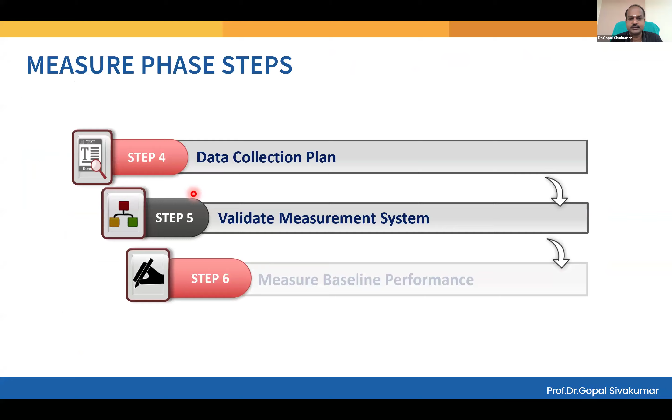Clear, all of you? A very scientific way of gaining control over the process. And you're not simply going with opinion. If you go with opinion, sometimes your decisions will go wrong. But if you go with average and standard deviation, things just cannot escape from your eyes. Hope all of you understand whatever I spoke so far. Yes, sir. All this I have discussed with you on the previous day. So straight away, I'm going to the CP and CPK.

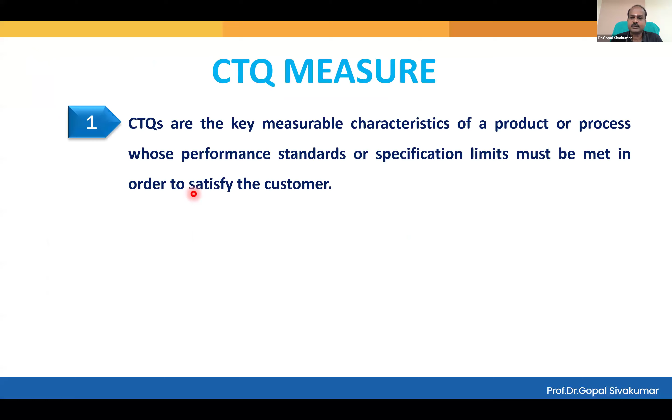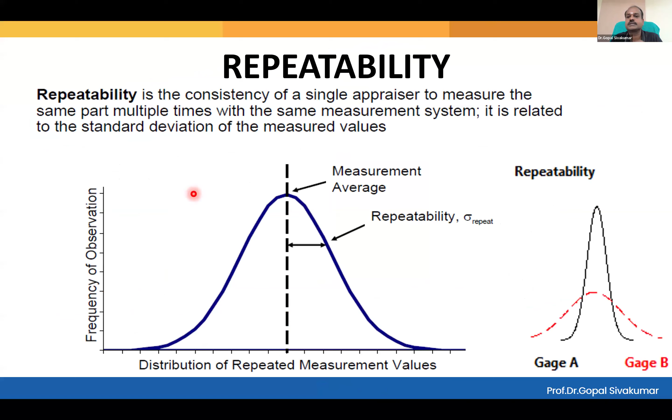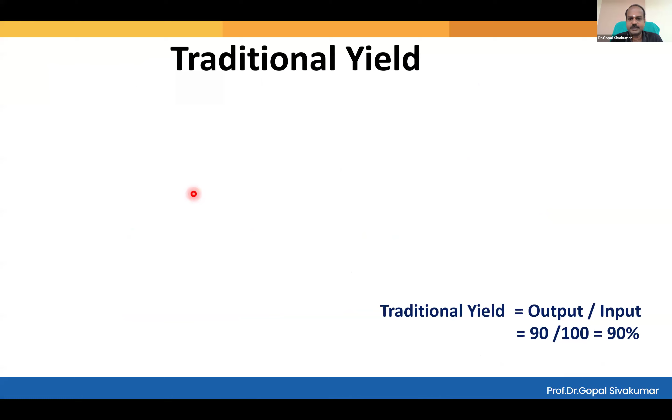Now, the very important things as far as CP and CPK are concerned are upper spec, lower spec, process average, process standard deviation. Just these 4 things, if you have, you can calculate CP and CPK. Yield, DPMO, all were taught to you. Very good. So now comes the formula for your CP and CPK.

CP is known as potential process capability ratio. The name itself indicates something. Can you see the word potential here? Potential means there is a possibility. CP doesn't confirm real capability, right? But CPK is known as process capability index, which means it has a measure of the real capability of your process. So out of the 2, which is better? CPK is better, because it carries information about the real capability of the process.

Hereafter, when you want to conclude about the capability, please look at CPK. If you simply look at CP and make a decision, you may go wrong. But if you look at CPK and take a decision, you cannot go wrong. Why is CPK advantageous? Look at the formula. In CP, what is USL? Upper specification limit. LSL means lower specification limit. Sigma means process standard deviation, calculated from the process data. Only this much information is used to calculate CP.

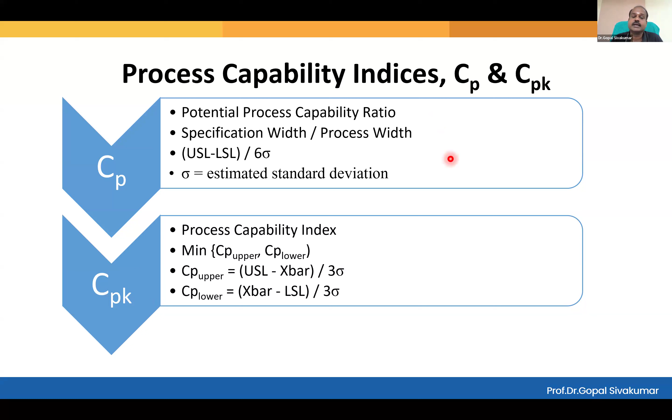See, why am I very much concerned about the average? When you want to shoot the target, you want to know whether your bullets are closer to the target, isn't it? And particularly, whether the majority of the bullets are closer to the target or not. For that, you need to look at the average. If the average is closer to the target or on the target, it confirms that the majority of your bullets are closer to the target. Okay.

And now you see a process here, all of you. What is the upper spec here? 50. Lower spec is 30. So what is the customer targeting? Customer target is how much here? 40. And now your process average, X bar. X bar is how much? X bar is also 40. Customer target is mu. Process average is X bar.

All of you, do you understand the difference between customer target and process average? Yes, sir. How do you understand customer target? One target specified by the customer. Actually, it is the midpoint between upper spec and lower spec. And you want to make sure your average appears on the target. So in this case, X bar is 40, customer target is also 40. Is it a good scenario or bad scenario? Good scenario.

And now your process control limits. Control limits are nothing but the points 3 standard deviations away from the center. In this case, standard deviation is assumed to be how much? 2. So your upper control limit will be 40 plus 3 times standard deviation, 46. Lower control limit, 40 minus 6, which is 34. Now, are you able to see your control limits inside the specification limits? Yes, sir.

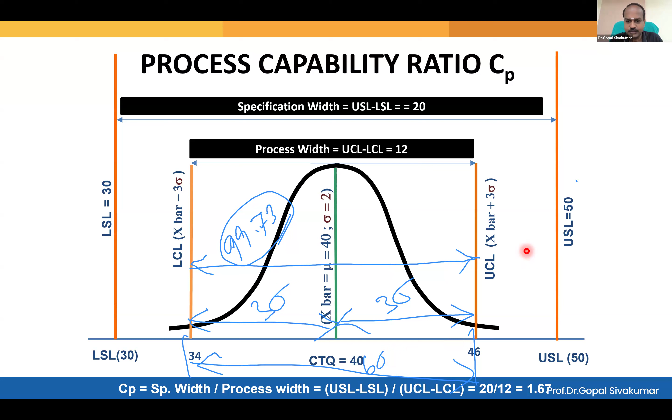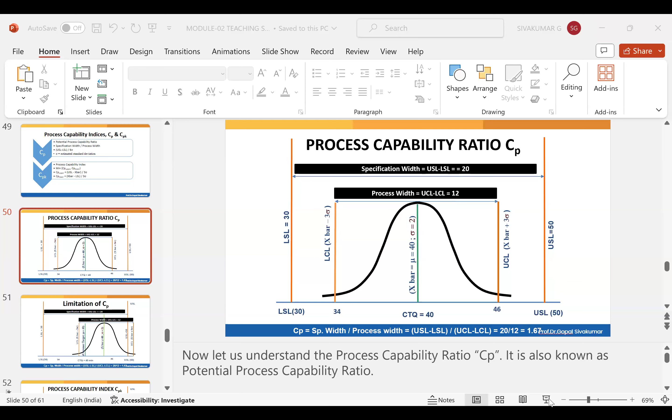And now, according to this particular slide, my process is capable, and the process is under effective statistical control. All of you understand why I said there is an effective control? Do you know why I say? I have only one doubt. Yeah, please. 99.73 I am able to understand within control limit, but the 100% will be within the spec. Am I right, sir? Correct. We can only comment up to control limit.

But if you want to understand what will happen up to specification limit, you should know the value, and then you need to find out how many standard deviations are still there between your control limit and specification limit. See here, your control limit ends, right? Yes, correct. And your specification limit is here. Now this distance has to be understood. If you understand the distance, you can go to the normal distribution table and find that extra percentage also. But very, very sure up to control limit 99.73. I'll show you in Minitab. Don't worry, that can be calculated in Minitab.

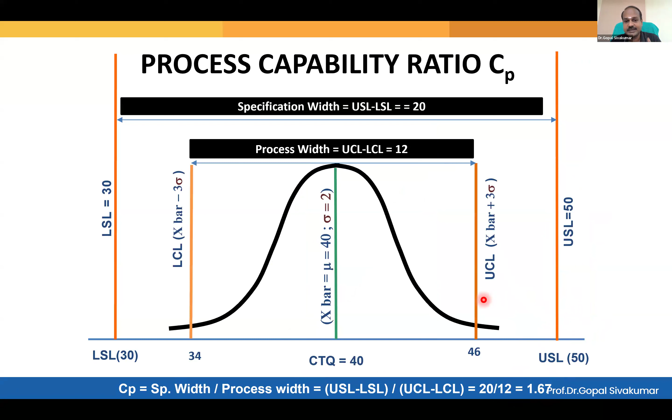So don't conclude about the capability just by looking at CP. Earlier, visually also it was confirmed. But here, the visual depiction is not confirming the capability. So when you see CP at an acceptable value, what you can definitely conclude is the process is under statistical control. When your CP is okay, if you plot a control chart it will also be okay. All right? So the process is under statistical control, but not capable. There are rejections happening on the right side.

So my piece of advice to all of you is don't look at CP to understand the capability. Then what is CP for? To understand the control. Control is different from capability. Am I right? Right.

Let's say a student is scoring above 90 marks in all 10 exams. He has good control over his examination process. Am I right? He always scores above 90. 10 exams, all 10 exam marks are above 90. Can you see good control here? Yes. There is another student who always scores single digit marks. All 10 exams, his mark is single digit. He also has good control, isn't it?

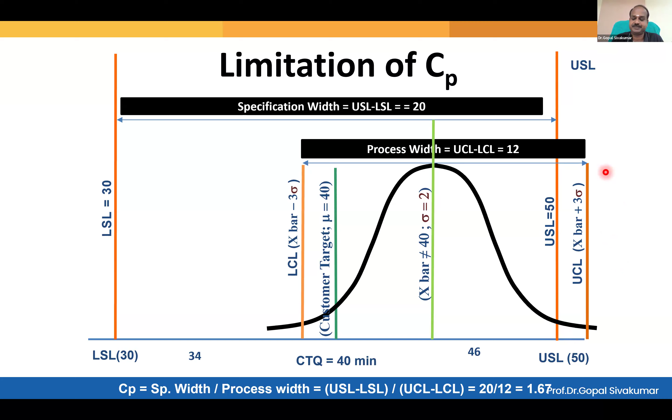Good control means consistency. One student is consistently scoring high marks, another student is consistently scoring low marks. So consistency is there. CP can talk about consistency. So CP should be more than one as a general requirement. But the industrial standard, AIAG, Automotive Industry Action Group, is 1.67 for critical processes and critical characteristics, and 1.33 for non-critical processes and characteristics. So CP cannot indicate our capability. It can only indicate statistical control or consistency. That is why CpK is introduced.

CpK, in addition to checking the spread of the process, will also check where the center is. And where do you want the center to be? You want the center to be on the target, am I right? Now, can you see the center on the target? Yes. When your process is centered on the target, the distance between center and the upper spec, and center and the lower spec, can you see both at equal distance? Please confirm. The distance between process center and the nearest spec, the blue bar and green bar, can you see both of equal length? Yes.

Now, if my process is shifted, the balance will get disturbed. If my process is shifted to the right side, you know what will happen? The blue bar will reduce. So this is the clue to understand whether our process is getting shifted to the right or not. So in this condition, the CpK formula is USL minus X bar divided by 3 sigma. Why 3 sigma? Earlier, we considered the whole process. Now we divided the process into 2 parts. The right side part is only 3 sigma, and similarly the left side is 3 sigma. The spread of the process is always 6 sigma.

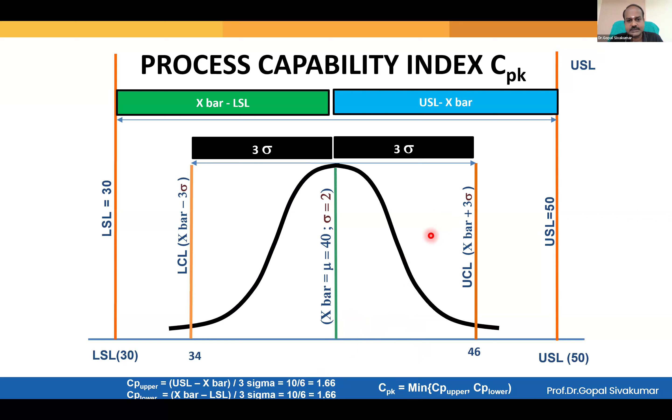So out of the two values, whichever is lower should be taken as CpK. In this case, since both are equal, your CpK is 1.66. Whenever you see CpK 1.66, you can simply conclude your process is capable, because the AIAG industry requirement is 1.67 minimum for critical parts or characteristics, and 1.33 for non-critical characteristics. And now, can you see a shifted process?

All of you? Is your process shifted or not? Shifted. When the process is shifting to the right side, what is the change you are observing? Can you see your blue bar reducing? The length of the blue bar is reduced, isn't it? Yes. The blue bar is the cushion available.

Please note, all of you. The blue bar is the cushion. Cushion means the tolerance given by the customer. Earlier, the tolerance was this much, but now it is only this much. Why? Because your process is shifted. I don't know why. Whether it's a worn-out tool or if the setting is wrong, there can be some reasons, right? You need to fix it.

So now, in the shifted condition, you find out the ratio, USL minus X bar by 3 sigma. And here, X bar minus LSL by 3 sigma. You will get different values. All of you understand what I'm speaking now? Why are you getting different values? Because your process is shifted. So the numerator, one side is reducing.

So out of the two values, which value should you pick up now? The lesser one or the bigger one? The lower one, smaller one. So 0.833 is your CpK. A CpK value of less than 1 theoretically confirms your process is not capable, which means there will be plenty of rejections. That percentage also we can find out.

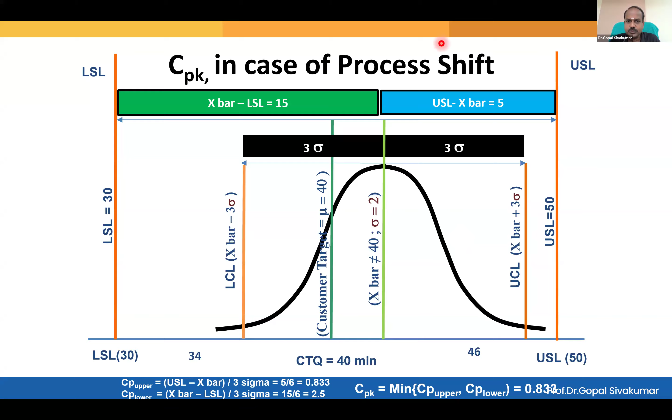Okay. But please note, when CpK is 1, your process is just capable. CpK 1 means your process is just capable. Let me show you one process which is just capable. One question here. Yeah, please. So by seeing this graph, we can see my average is shifted towards the upper specification limit. Correct. Your average is shifted to the upper specification limit. You're right. Okay. Very good.

That's it. Okay. So now I think all of you are able to see my screen now, right? So, can you see my empty slide, all of you? No, sir, we cannot. You can't see? Okay, I have to share the screen, please. Yeah. So can you see my empty slide now?

I have drawn a line. And now you see, this is my lower spec. And this is my upper spec. And my process is like this. Right? And now, this point. Okay. This point is my upper control limit. This point is my lower control limit.

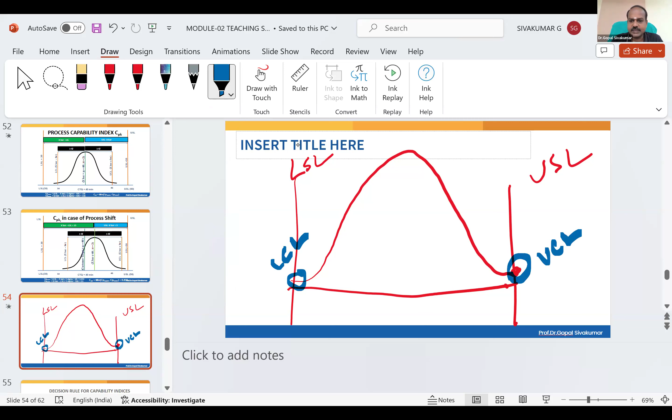Hope all of you know the difference between upper control limit and upper specification limit, isn't it? Upper control limit is the right extreme point from your process. Lower control limit, left extreme. But upper spec and lower spec are given by the customer. And now tell me, in this condition, what will be the Cp, CpK value? Will it be equal to 1? Cp will be equal to 1, and CpK will also be equal to 1.

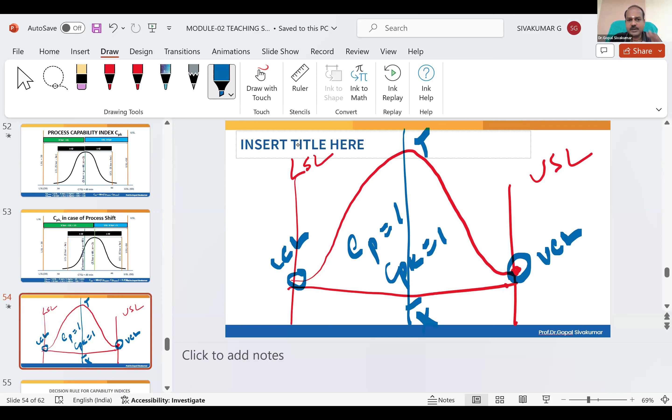This is the customer target. That is also the process average, right? This is the target. This is also the process average. Am I right? All of you are with me so far? I want all of you to confirm whether this process is capable or not. This process is just capable. And this process can be called a 3 sigma process. What is the name of this process?

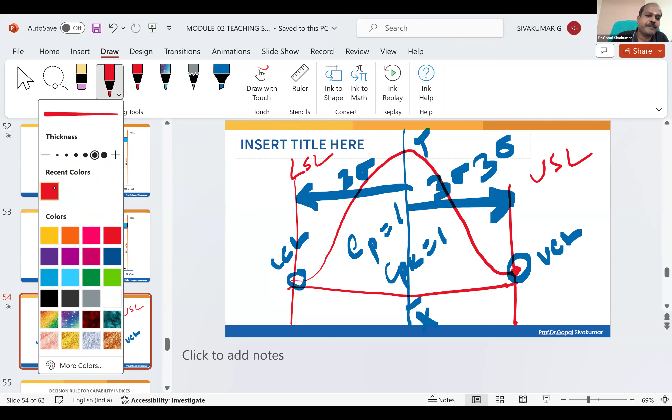3 sigma. Why do I call it a 3 sigma process? Because center to the spec, the distance is 3 sigma. Am I right? Similarly, center to the left spec, that is also 3 sigma. So what is the name of this process? 3 sigma process. Clear, all of you? And we also know, up to the control limit, what percentage of the parts are expected to fall?

99.73. When your process is just capable, please note, when your process is capable in this scenario, 99.73% of your parts are safe. What is the percentage of the parts inside the spec? 99.73. So what percentage of your parts are under risk now? Risk means in this range, left side or right side.

0.27. All of you please note, this statement is true only when the process is not shifted. Am I right? But we very well know our process will shift. Somebody will drift our process, pull our process to the right side, or somebody will pull our process to the left side. For example, in the training process also, do you think some participants are pulling our average?

Yes or no? Some people are not able to attend the session. They're also not able to go through the recordings. Now, what are they doing? They are pulling our average downwards. Some people are putting more efforts, more participative, and they are trying to score high marks. They are pulling our average to the right.

So the same thing will happen in any business process also. As long as that pulling is not there, shifting is not there, the process remains capable. But when the process is shifted, rejections will happen even in a 3 sigma process. Please note, a 3 sigma process, even though it gives a guarantee of 99.73% success rate, that 99.73 will get damaged when your process is shifted. Clear, all of you?

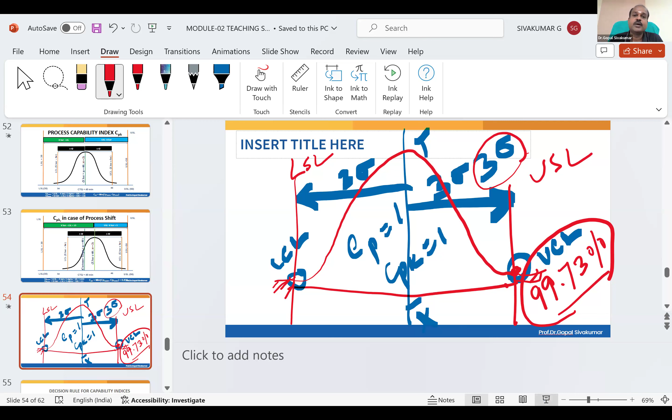99.73 can easily drop to 90, and 5 to 10% rejection. Every time rejection is happening, every shift in your factory rejection is happening. You know why? Because of the shifting only. Right? And over and above the variation, there is a shifting. So now that you all understood what is a 3 sigma process, can you please, all of you, confirm? Do you now understand what is a 3 sigma process?

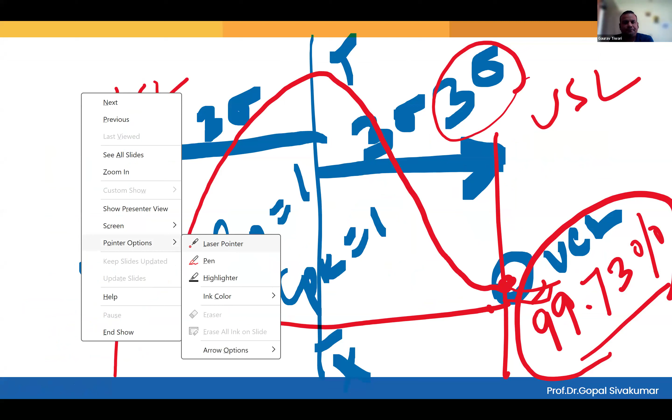Yes, that's capable. Can somebody define 3 sigma process by looking at my slide? What are the characteristics you notice when it is a 3 sigma process? Sir, see the control limit? CP and, sir, CPK 1. Very good.

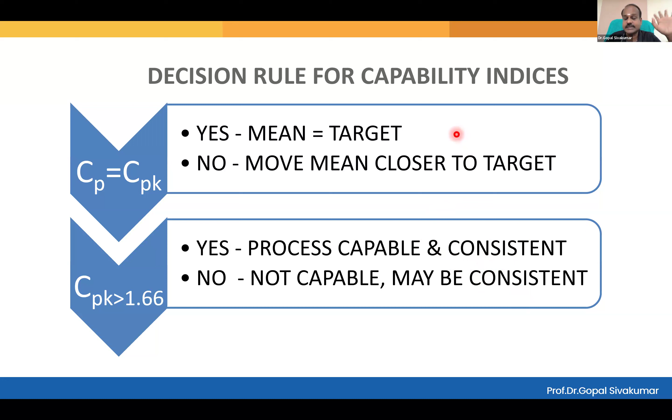A scenario where Cp is acceptable, but Cpk is not acceptable. Since Cp is acceptable, consistency is okay. But Cpk is unacceptable, so capability is not okay. I think you all have understood Cp and Cpk very well now. And now there is a small example, and you can have any example here. Don't worry.

There is a situation. Upper spec is 30, lower spec is 0. It can be, if it is a bank, reimbursement process turnaround time, or if it is a manufacturing company, surface finish, roughness, whatever. Upper spec is 30, lower spec is 0. Process average is 22. Process standard deviation is 5.9. So I use the formula to calculate Cp. My Cp is 0.8.

Can somebody comment now? What's happening in your process? Process is not stable, not consistent. I like the word not stable. Process is not in statistical control because Cp is under trouble. When Cp is under trouble, your Cpk will definitely be under trouble. Please note, all of you: Cpk can never be more than Cp.

And now I go with the Cpk formula. When you calculate Cpk, two values will come. Right side value is 0.4, left side value is 1.2. Which side is affected? Right side is affected. That means your process is shifted to the right side. Rejections will happen at the upper spec. So out of the two, you should take the lower value, 0.4.

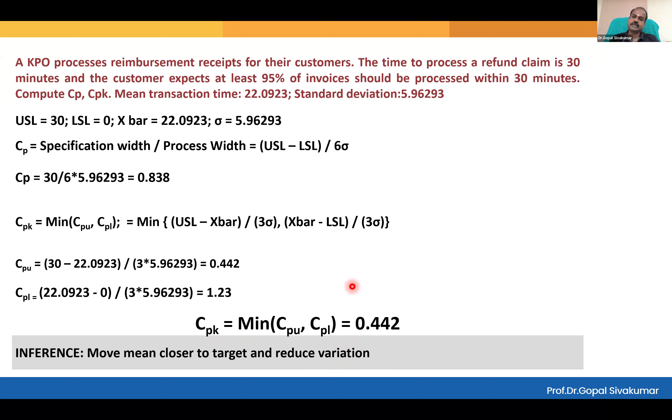All of you understand here the recommendation? Any doubt? All clear, right? Okay. Yes.

Now another scenario. Upper spec is 110, lower spec is 90, process average is 107, process standard deviation is 1.5. So CP equal to 2.22. Can somebody tell me what will be your conclusion now when you see CP equal to 2.22? Process is stable. It is towards upper specification limit. Process is consistent. Stable. Consistent. Very good. Process is stable, consistent, under statistical control. Variation is absolutely minimal. But you need to conclude about the capability after looking at CPK.

When I calculate CPK, left side absolutely no trouble, but right side there is a big trouble, 0.66. So I don't have to do anything with the variation, but definitely my process should be retargeted. I must shift the process towards the left. I mean, move the process mean close to target. When I do that, my CPK will improve.

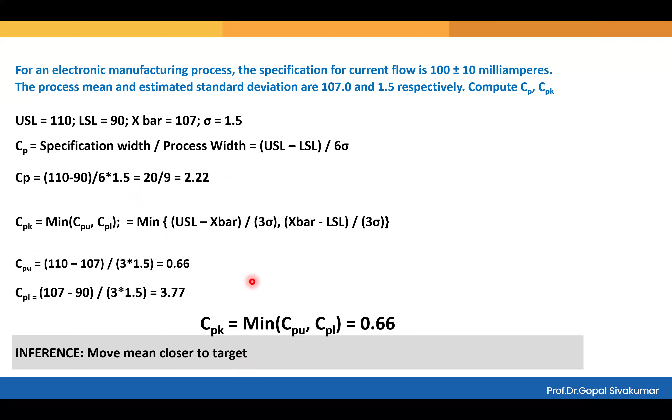Now another scenario. Upper spec equal to 0.5045, lower spec equal to 0.5025, and average is 0.5031, standard deviation is 0.0003, CP equal to 1.11. For a critical process, 1.11 is unacceptable. And so the recommendation is reduce variation. Clear? Yes.

And I calculate CPK. Two values, 1.55, 0.66. They are different. So minimum I should take, 0.66 I should take. And this time the process is shifted to the left side or right side? Left side. So move the process average to the right, close to the target. And this is the recommendation, statistical recommendation.

As a consultant, we can simply say, hey, move the average. But how will they move the average? For example, your exam performance, the class average, our target is how much? We said 90. But your average is only 45. Now, how can I move the average upwards? Maybe increase the number of hours of the class, isn't it?

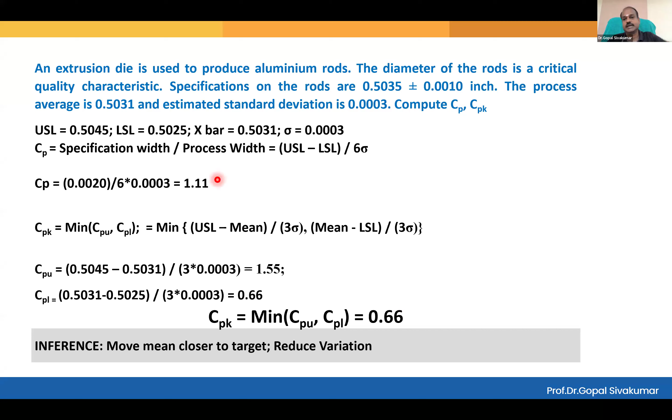Yes, sir. Efforts. Mock exams. Mock exams, extra classes, extra exams. With all these efforts, we can push the average. That is called move the mean. Similarly, what needs to be done, you need to find out.

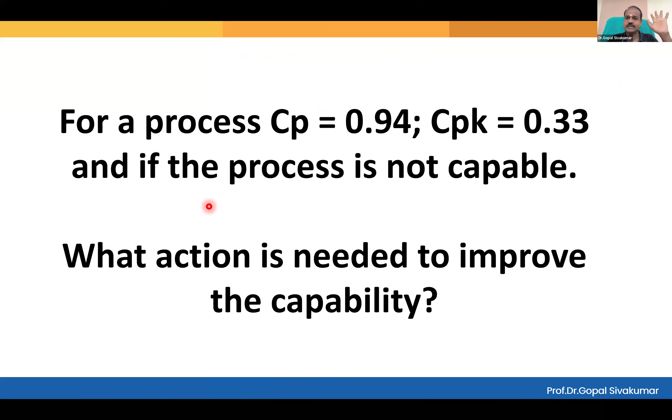Now tell me, all of you, what should I do? CP equal to 0.94, CPK equal to 0.33, and process is not capable. What action is needed now? Reduce the variation and move the mean. Very good. Fantastic. So you all have understood.

Capability can be measured in terms of yield. And within yield, you have three types: first pass yield, rolled throughput yield. And now for continuous data, we can use CP and CpK. And you all know first pass yield means we want to produce the products without doing any rework. That is the objective for first pass yield. And DPMO stands for defects per million opportunities.

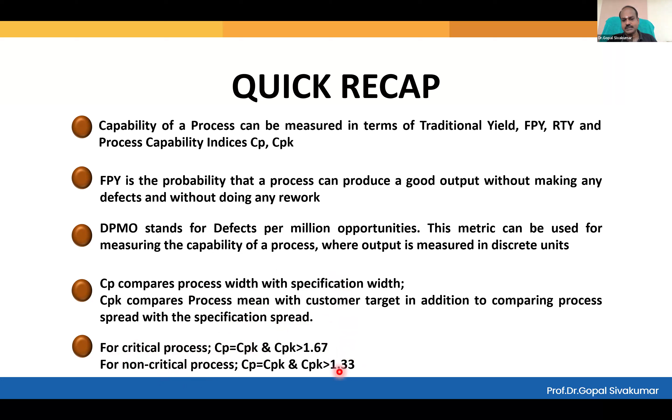But now coming to CP and CpK, CP only compares the width of the process with the width of the specification. But CpK, in addition to comparing the process width and specification width, will also check whether the process is centered on the target or not. That's why it is advantageous. For critical process, we want both CP and CpK to be more than 1.67. And in an ultimate scenario, CP will be equal to CpK. Similarly, for non-critical process, both of them should be more than 1.33.

So this completes our discussion on CP and CpK. I hope all of you have now understood how to use CP and CpK. Am I correct? Yes, sir. Excellent. If there are any questions, you can ask.

Sir, actually, I had only one doubt. Yeah, please. CpK is 1.33 means how much sigma, sir? For example, 6 sigma means 1.67, 3 sigma means 1. 1.33 means... No, you are confusing. 1.67 and 1.33 are requirements for CP and CpK. All right? Requirements for CP and CpK. And there is no rule for sigma, that sigma should be this much, that much.

No. See, the value of sigma can vary from company to company. You understand? It depends on your data. Based on the data only we calculate. So there is no specific recommendation for how much the sigma will be. Okay. But CP and CpK should be more than 1.67. Sigma can be any value. Only your process data can tell that. All right? Any other question anybody would like to ask?